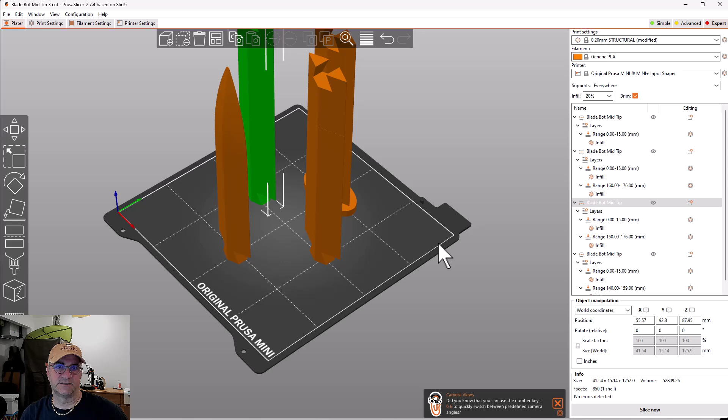So you can see the dovetail joint here. And what happened was these dovetails turned out to be super weak. You saw it in another video. So these are the pictures I showed in a previous video. You can see how thin the dovetails are here. I had done a 15% infill with no additional reinforcing, and that did not come out very well. Even this one that looked pretty stable really wasn't that stable. There wasn't a lot to it, and like I said, this is 15% infill. It seems like a lot less than 15%, but what do I know?

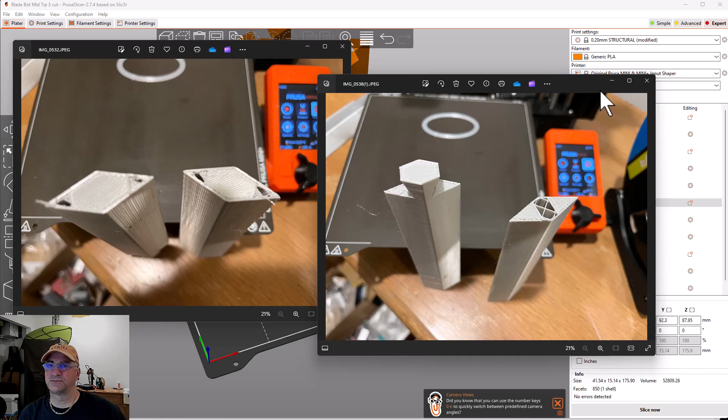So the problem, I still wanted to use a dovetail, and basically the idea was to make these solid fill here and solid fill here, and then down inside solid fill for a certain distance, so we would end up with a stronger joint. The way to do that is actually you can add a range. In this case, this one only has a dovetail at the bottom. What I decided to do was just strengthen it up a little bit into this dovetail and make it solid. Man, that probably wasn't enough now that I'm looking at it. But anyway, I said I wanted 15 millimeters of solid.

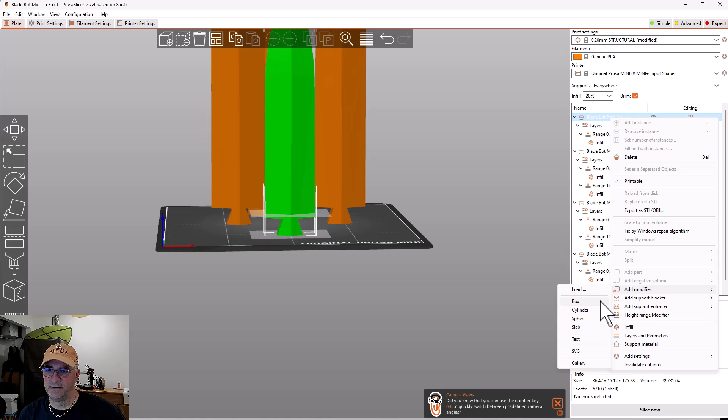So basically, when you look at one of these, you can do right mouse, add modifier, and height range modifier is the one I did. So you can add a height range modifier, and then you can add an infill on that. So in this case, we have a height range modifier, and you can see here, I could have added an infill. So height range modifier, 0 to 15. It turns out if I want to edit this, I can actually add additional modifiers. So here you can see my original modifier. It's a little weird. You go down in here, you can have multiple range modifiers. Each one you can change. I should have made this one bigger.

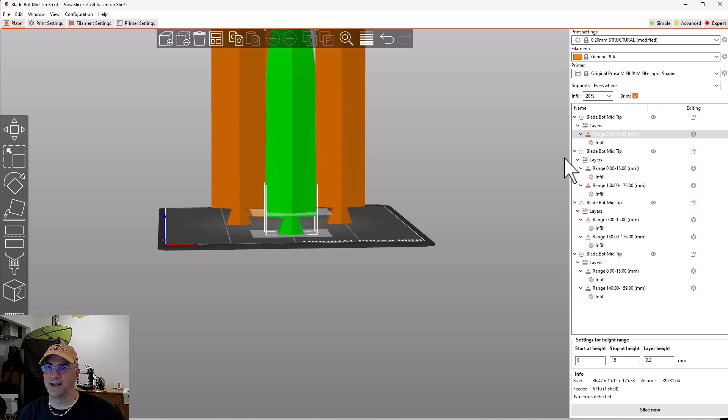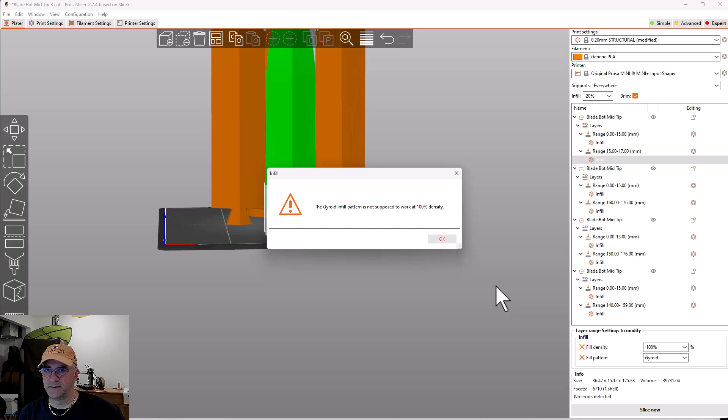Dog it. Anyway, it turns out if you want to add another range modifier, like in a different location, you can do that. Hit this plus sign. Now you get another modifier, and this modifier we could also set the infill. And in this case, I'm going to set it to be 100%. And we can't use gyroid for that, so it made it rectilinear. And so now I've got an infill from 0 to 15 and 15 to 17. So that's it, right? That's all you need to do.

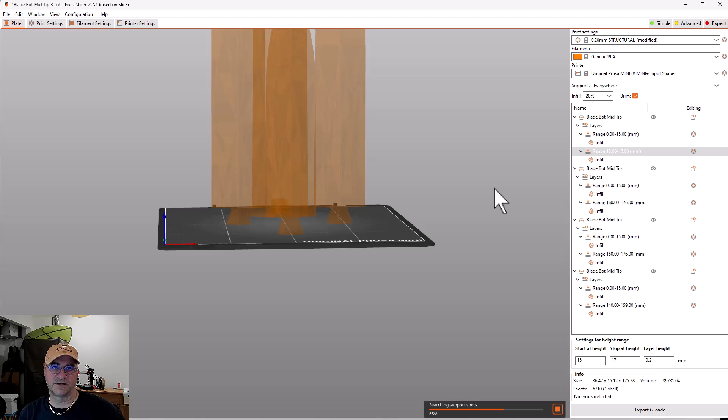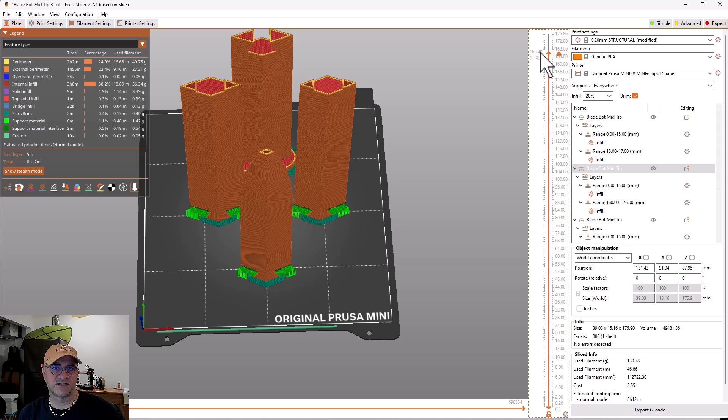Actually, what I'm going to do is slice this and show you how it works. So it's sliced. Let me just pick one of these. Nope, that won't work. Oh, he did it wrong again. So let me reslice that. So what I want to do here real quick is just show you the parts, they're solid. Let me turn this so you can see it even more. They're solid as we get down. These two are two different heights a little bit, but you can see they're solid down into the unit and then down to a certain distance, and then I did like a 60% infill on these to give them more support.

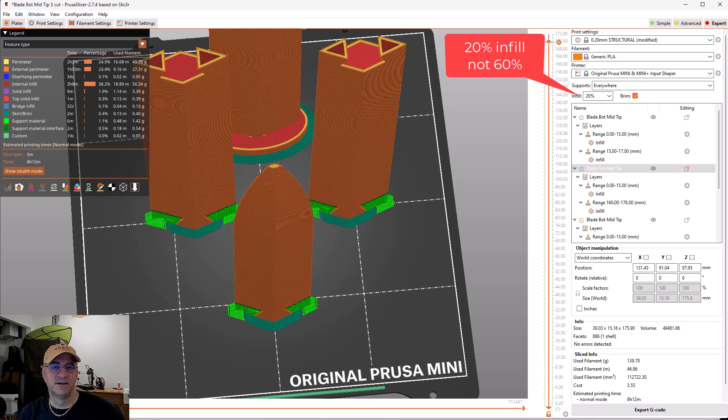So that was the whole idea here, to make sure that this joint right here was solid to the box and that we had some top on it. So I probably could have made these even taller. Maybe I will in the next print. But that made it super. So what does that look like? It looks like this. I can't see myself. But basically, now I ended up with this, right? You can see that joint.

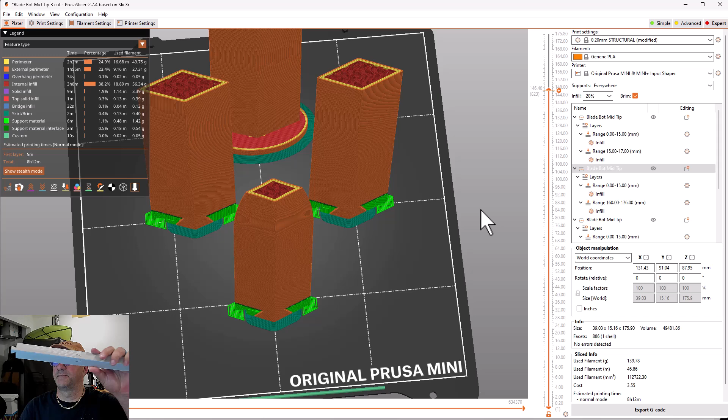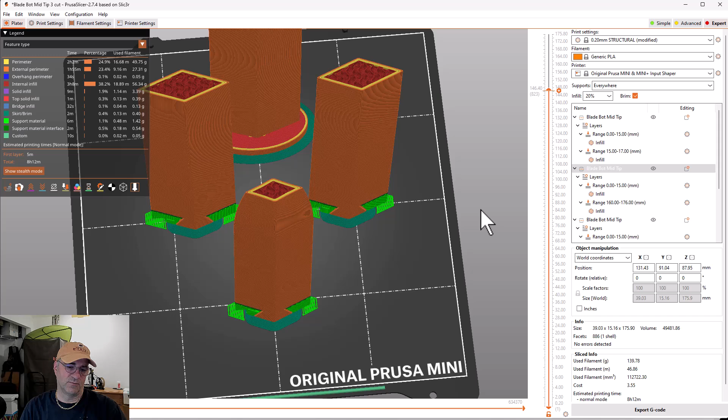And then we can take all these together. These actually should be super glued, but you get the idea, right? And that's the blade now put together. Now, it doesn't look crazy awesome with the joints, but I think that's not a big deal. We'll just glue it and we'll have something that'll hold up for a while. So that's the fix for this. And I'll link the other presentation to that also.

And now I just need to figure out how to turn the camera off.